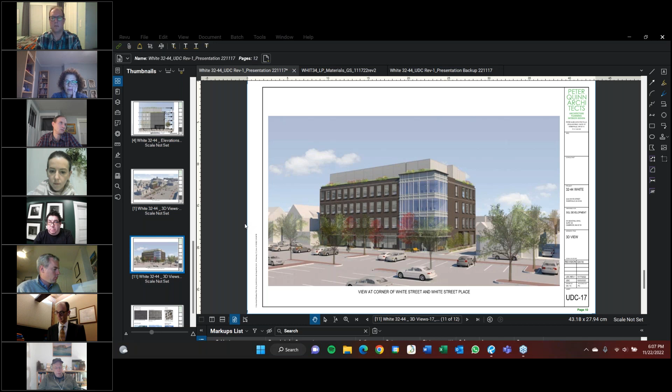Good evening, everyone. Thank you for making the time for us this evening. We've put together a concise presentation of the changes that we've made from the previous presentation in regards to comments that you had made. I think we've addressed everything, hopefully satisfactorily. So I'm just going to start. I also presented a list in the package of changes from the previous submission in narrative form, so I'll go through those if that's okay.

Now I do notice that a couple of people from the commission who were not in the original presentation are here tonight. Can I assume that they've reviewed the recording and we can move forward that way? For the record, I have reviewed the recording of the prior meeting. And Mr. Valdez has not reviewed the recording, but he is still able to participate in the discussion. He'll just not be participating in the vote this evening. Okay, thank you, that's good.

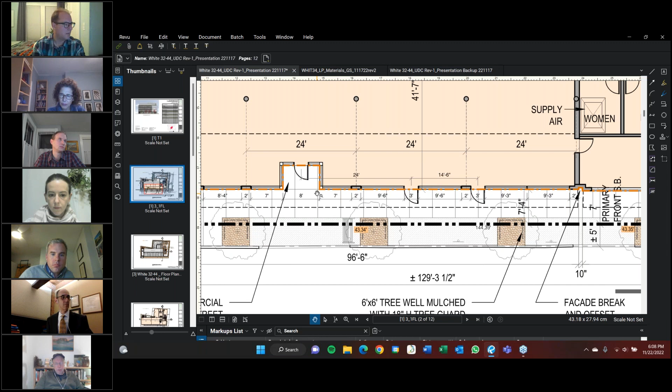Starting with plan changes that we've made, right off the bat, one of the things that was brought up on several occasions and from several different directions was the way that we had treated the base of the building in the commercial side on the left-hand side of the building. So we've created a niche for a doorway, a nice generous space, and you'll see that in elevation as well. At any point, if there is a commercial customer-facing user down here, they will certainly have a nice entry. The other entries are put in per the zoning bylaw to have a door every 30 feet.

On the rear wall, there was quite a bit of discussion, especially around landscape, about how we were treating this back part of the building. Here we've simply straightened it all out and tried to get rid of some of the kinks that were in here, and now it's just a consistent gravel walkway to the rear. We created a raised bed in this area, and Katya from the landscape department will speak with you about that later. We knew we were going to have a raised structure here to get the ramp to work underneath it, so we raised it even further with a planting bed, and that is integrated into our planting plans now.

In the basement, this is a small thing, but we wanted to take care of it. We did widen the drive aisle at the base to make it easier to get in and out of that driveway ramp going up, and we gave a full 20 feet back out for our innovative parking system here.

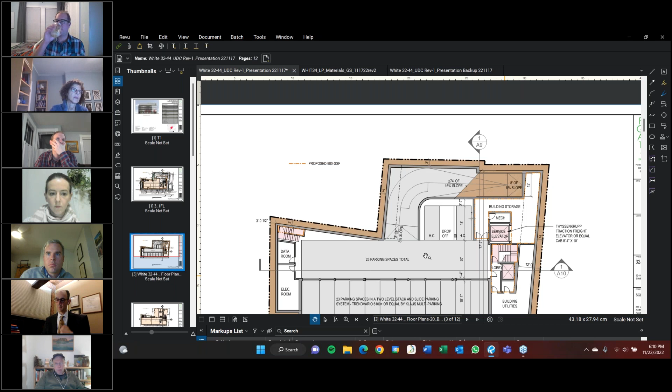The next thing is we had to revisit our bicycle strategy, especially around short-term bikes. So we now have five short-term bicycles that comply with the code. We also added a second bench in the front here and moved the short-term bikes over to this recess because we had originally had them on city property.

And then didn't want to let this go by without mentioning that on the roof, where we have a lot of mechanical system, that actually supports a structure that is solar ready. So you'll see that in a second when I go through the previews. That structure there can hold the solar panels when the time comes.

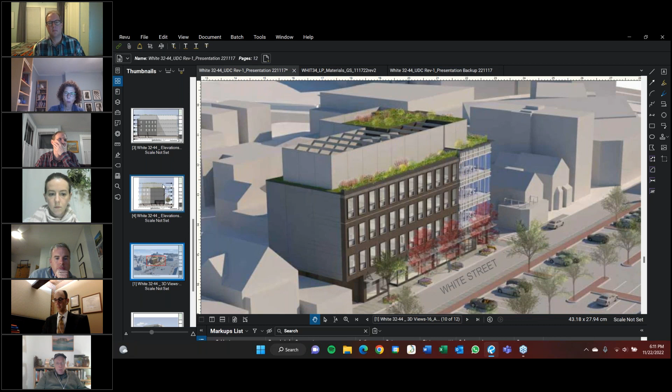Now, as far as the elevations go, where most of the work was done, let's get to my notes. We really emphasized what was called facade option number 2. We felt we could work with that the most in bringing it to a conclusion with some of the changes that you had requested. And so we did draw some things from the other two facades, but for the most part, we emphasized our work on this, what was called option number 2.

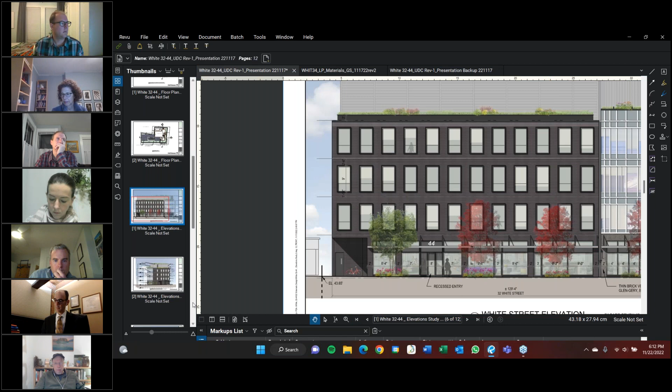So what we've done here is we've used a darker brick in this area on the commercial side of the building. We actually presented that in a set with a sample from the manufacturer's website. And on the other side to the right, you see there's a kind of lighter gray brick. That is what's used here and in this area here.

And to the same point, we did use that kind of brick in the upper area of the building to create a little bit of a differentiation of the top level of the building. So that has some of these lighter gray brick stripes up there now.

We did add wooden mullions, and we presented the windows with some scale elements such as blinds, which you presumably have in an office setting or a lab setting.

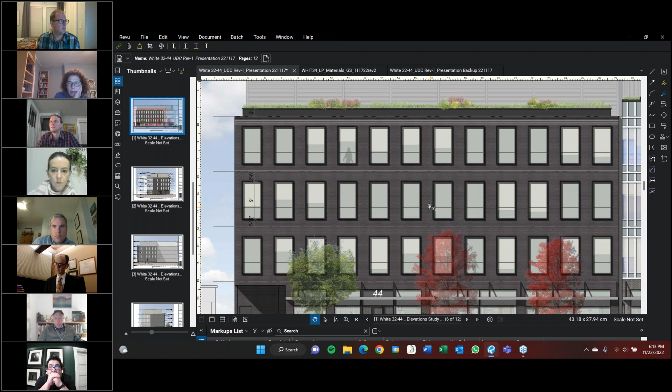And these planters are much more substantial now. They approach the full depth you would normally have for good-sized plantings such as we're showing, and that actually becomes part of a crown of the building, if you will. So with the banded brick and then the setback and then this raised planter, they're all architectural elements that are trying to work together to create the top edge of the building.

Elsewhere, let's see here. This spandrel glazing has been refined a little bit, and the mullion system is a little more interesting than we had before. We've also introduced some blinds and some sense of the space beyond just for graphic purposes.

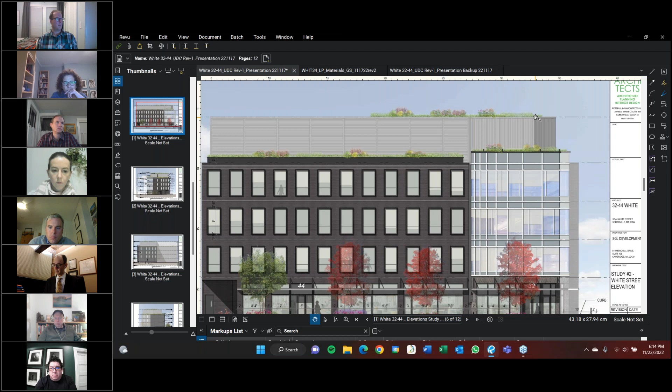As you can see up here, we've added another level of what would be a green roof, but it'll have a shorter depth of soil. I think we talked about that, but it is another green roof that we managed to expand into.

The glazing that we're using, these are some of the things we'd like to consider. Of course, we'll try to get a sample and do a site mock-up, or what do you call it, an as-built.

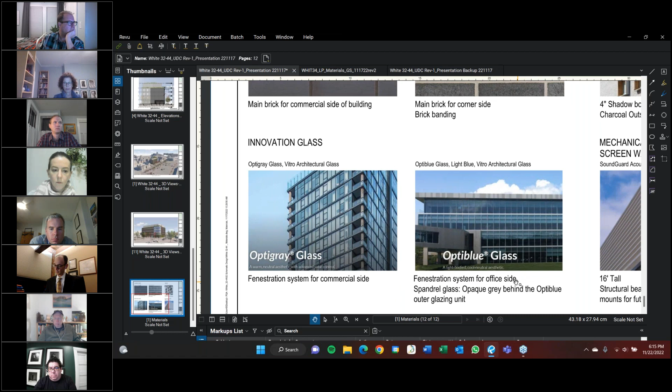In the main commercial side of the building, we have kind of a gray glass that has a little bit of a blue tint, but it's primarily gray. And then on the other side, the corner, we would like to use a glazing that is a combination of gray and blue. One side, the opaque, is a light blue, but it also has the spandrel, which is a gray color above. And you can see that here.

Now, one thing that we did do that we started to talk about a little bit before is these windows have surrounds, which create a shadow effect. You don't see too much of that the way this is presented right here because everything is somewhat dark, but I think you can see it in the 3D quite well.

So what we've done is created a banding that projects about 4 inches from the wall, and it's bicolor. The outer side of it is a charcoal color, and the inside is white, or off-white, or something like that. You can get a sense of how that would work and create a kind of dynamic effect as you walk past the building.

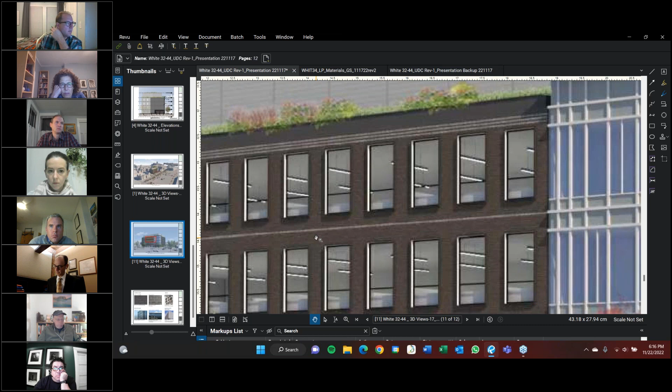Also in the elevations, at that entry I mentioned before, we tried to locate it further down the building as far as we thought would be useful, so it acted as a counterpoint to the main entry. We've also added signage on that extended canopy that travels the whole length of the building.

We've also arranged it so it didn't interfere with our tree pattern, and when people come out of the building they have more ability to move forward out to the sidewalk without bumping into the tree planters as we had before.

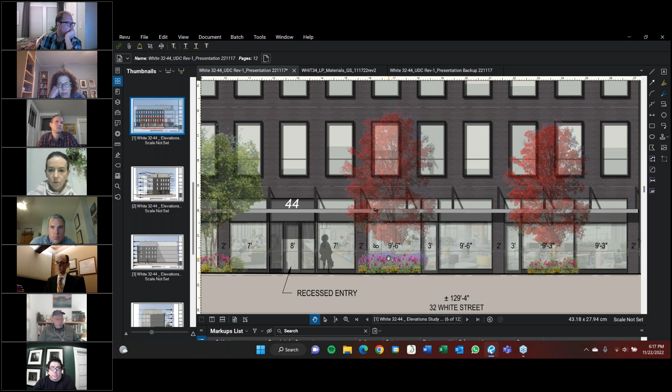On the side view of the building, we've cleaned up these recesses and openings for our automobile ramp and for our truck bay loading area, and these all work pretty well now. I think what I showed last week, the turning radii, so I won't go into that again, but all those things are still held fast and do work.

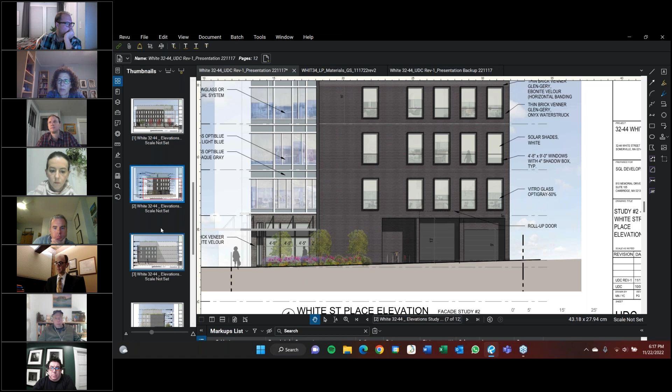Thank you. I just have 2 more comments on the rear of the building. There were some questions about that. So we actually kept the same window proportions that we had on the side, but we don't have the aluminum frames around them, or the projected frames.

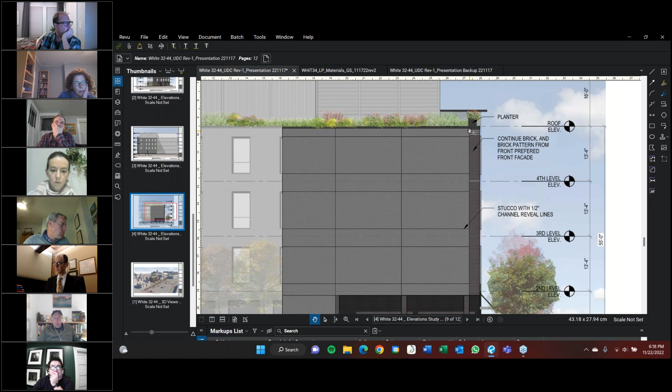This is a stucco finish, and we're introducing these zinc U channels into the wall to create a grid. That's carried across the whole rear all the way to the side facing the immediate abutter, and you can see how we wrapped around the brick at the corner, the end of the facade, so it has enough return to be substantial.

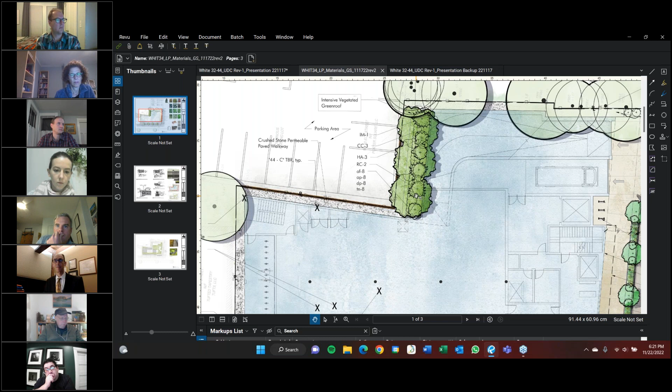The rest would be planter edges built taller than the finished grade, so there'll still be a clear path of travel around it alongside the property line.

We've expanded the bioswale, its length, as well as the root zone for the trees to grow in that bioswale. We're doing this—you can see it in detail on the next page, but on this page you can see a slightly shaded tone to the right of the curb line. And the intent here in our design includes...

...structural soil below the asphalt paving. This is a private way, and as part of our project we're going to have to provide a lot of new utility lines and things, and some of this asphalt will need to be replaced anyway and repaired in kind. As part of that construction, we will be providing structural soil continuous to the plant bed.

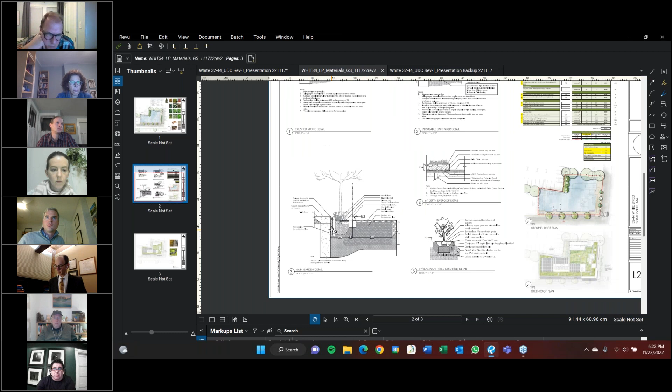Yeah, there's a good picture of it. So that bioswale, which is constrained in its width by the garage wall below on the left in this image, is constrained to about 2 to 2.5 feet wide, which is quite narrow. What we're doing is providing a place for the roots to grow below, sort of slightly smaller than typical, under that curb and over to the right underneath the asphalt in the private way. As I mentioned, we lengthened the bioswale overall along that sidewalk and planted a third small tree along that length.

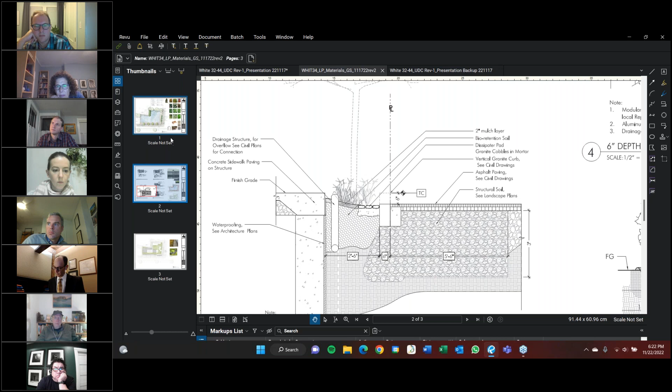Okay, thank you. We also refined the plant list for the tree plantings along White Street itself. There's actually an overhead wire to the left, so the tree on the far left will have to be a smaller size variety street tree. And as was suggested at our previous meeting, we will meet with the Urban Forestry Division and go through the species of the trees selected here to make sure they're appropriate for the situation.

And lastly, on the last page I think there's a third page that shows the roof, Peter, and that's where we can end. As Peter described previously, we've added another level of green roof above the mechanical room area, so there's a much larger zone overall on our roofs that will be vegetated green roof. The zone above the mechanicals in the center of the building will be a 6-inch depth green roof, vegetated with more sedums and slightly smaller plant materials.

Then the zone around the perimeter at that lower level, which Peter has designed as a taller architectural element, would be able to host taller ornamental grasses and things. So right now we're showing 6 to 10-inch depth of growing medium, and overall we still meet the green score, so that's good. I think we've improved the plan overall with everyone's comments and with all these refinements.

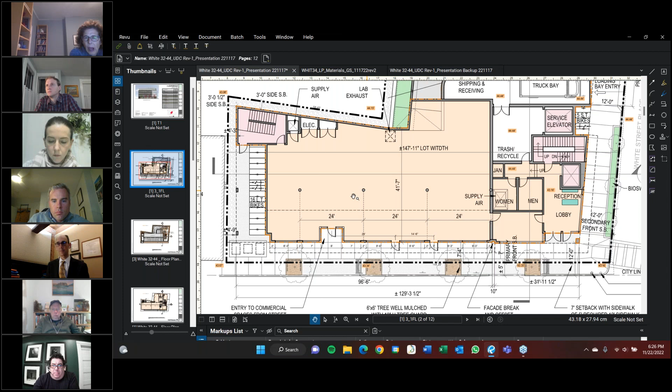What are those three dash boxes in front of the bikes? Okay, so we will have a very large underground electrical vault. This is flush with the ground, and it usually has these galvanized metal covers on them, and you can walk across.

So Emily, I had a question pertaining to these underground vaults. Being that now everything from a sustainability perspective, and the idea of being able to maintain power under any circumstances, a lot of places being designed are not allowing for vaults to be located below grade, just because of standards being established from energy and sustainability.

The idea that it's being proposed that these are below grade has not been obviously reviewed or vetted with NSTAR or Eversource. What happens to the design if these get pushed up and need to be maintained at a level above an established datum that Cambridge has, for purposes of water impacts? What happens in that situation? Cambridge does not allow below-grade electrical vaults anymore, and Boston doesn't either. So why are we even considering that this is okay if at any point these are going to come above ground, and then where are they going to be located?

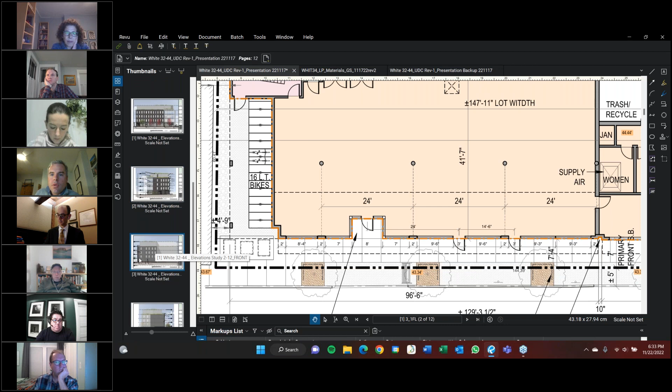I'm wondering if you could talk a little about the choice of material on the non-street facing sides of the building, the stucco. It's a pretty dramatic material transition between the street facing sides and what kind of appears like a back of the building.

Right. So, this is a kind of a tight back side here, and it's not highly visible from the street. You will see the corner of it when you're coming down White Street Place, and you certainly would see it on White Street when you're coming down on this side.

We also do have a brick base and corner that we're maintaining, so at eye level or a little bit below eye level, you still will see a nice brick material.

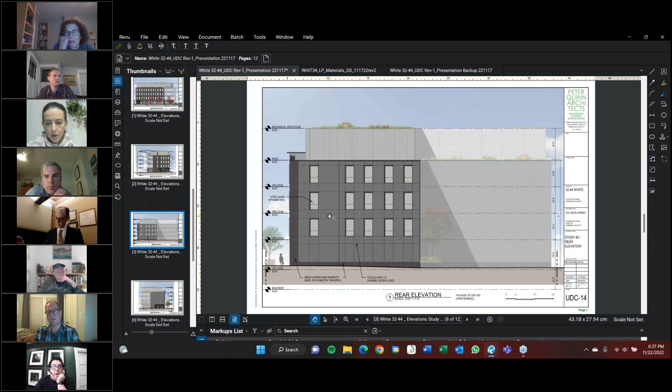And Mr. Graminsky is correct - you can provide recommendations that the planning board receive sample materials and further review certain materials. You can note recommendations for changes, etc.

I'd suggest that, and maybe that we take that path. My question was in part because there is a specific architectural design guideline for this district, and basically every district, that recommends against the use of EIFS.

They're particularly referring to the really cheap EIFS systems, which I understand what you're proposing here isn't that. But I do think, given this building and its context, this is a building that is much taller than what's around it, and that's likely to remain so, particularly on this side of the building. It's a residentially zoned neighborhood next to it. So these sides of the buildings are going to be visible from a distance, both from residential properties and adjacent streets.

To me, I feel like the street-facing facades are really well composed - there's depth, I think there's high quality materials being used. But this to me feels like a bit of a back, and a back that's going to be pretty visible. I think it would be different if this was adjacent to a district of buildings of similar height, because it wouldn't be visible from a distance. But in this case, it will be.

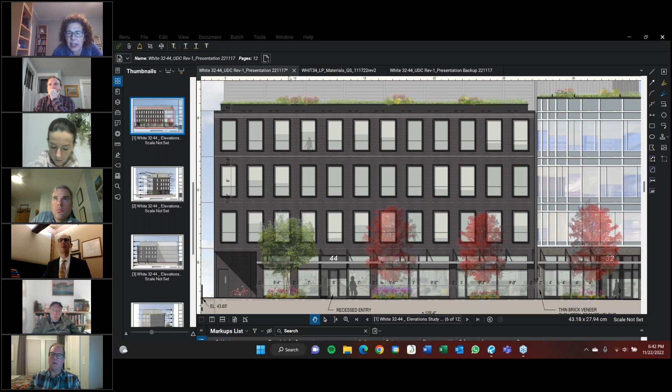I have a couple of questions about the windows and the details. It was a little hard for me to hear your description of the depth of the hoods, and the detail—I think you said a lighter brick that returned in, or whatever. But can you describe them again? Yeah, I'll go over it again, and the shades too.

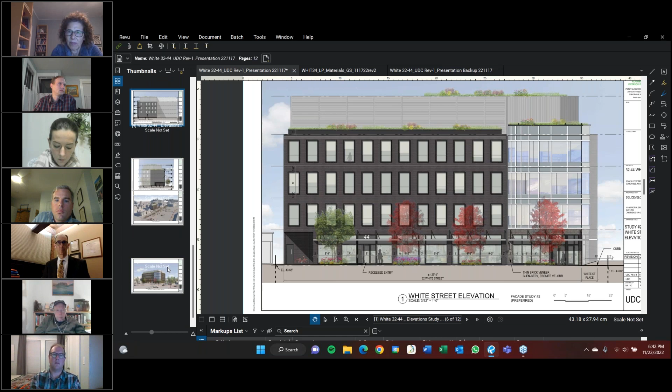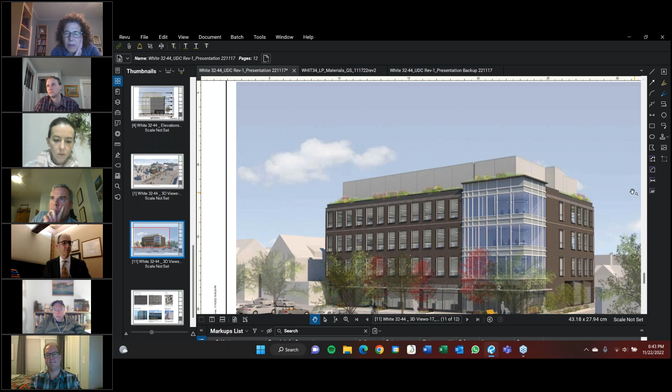What we have here is a material—this 3D view is probably best. So each of the windows has a 3-sided frame that extends out in front of the brick approximately 4 inches, with an additional 3.5 to 4 inch depth into the wall as well. So this is a band that's 7 to 8 inches deep total, half in, half out of the building. The intention is a play with light and shadow—the inside is a white color, and the outside is charcoal. It's a little hard to see, but that's how it works. Then there's a sill at the bottom, done with metal or a piece of ceramic material. That's the intention of these windows, and it's carried around to this side as well, where you can actually see the projection a little better.

And then the blinds and the lights are really just acknowledging that a lab like this, designed for these levels of lab use, will have solar blinds of some kind—not so much for privacy, but for solar gain, especially in the strong western sun, and any other need to cut out sunlight. Here we've drawn them all the same height for the purpose of this perspective, but there is actually a mullion coincident with the bottom of the blind. Does that answer your question? Yeah, it did.

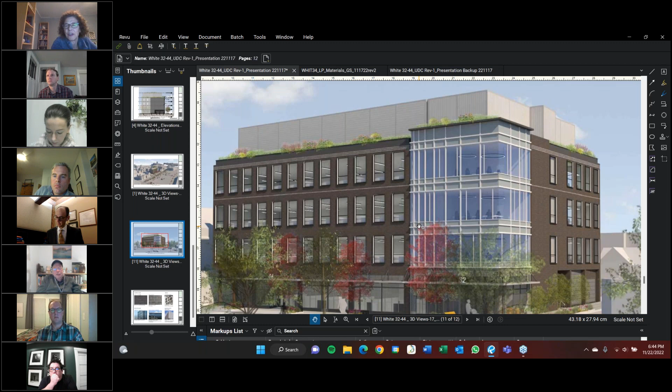Just a few comments here. First, I think the design on the street sides has come along, and it's good. I think the depth of those hoods around the windows is important, and if it could—there's kind of a precedent by this, right? Yeah, those are probably much deeper than 4 inches. I'd say the deeper they can be, the better, to get more shadow.

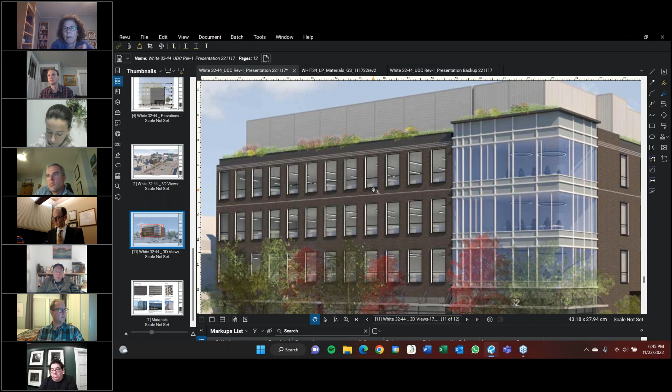You're not going to get a lot of shadow playing on the dark brick, but you're saying there'll be a brightness on the inside. I think the thing that worries me is the solar shading, your solar control, with blinds that are going to be all different heights, and if they're not good quality, they'll start to be even less organized than that. They make a big difference in how we read a building. And I wish there was some uniform element to this facade, exterior or interior, that accommodated the solar control for the inside, but wasn't going to yield something as disorganized as that. That's an interesting comment.

I don't think it's a positive thing. Maybe some people do feel that shades at all different heights is a good thing, but all of a sudden you won't see into the building at night except around those shades, and they'll really play on the overall effect of the windows within the wall.

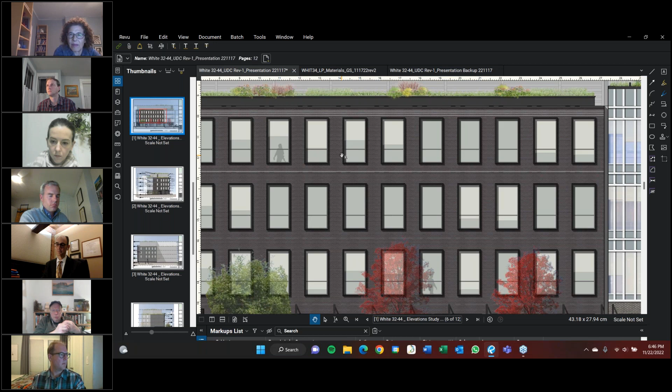So just a couple things — these are not intended to be opaque shades, so even at night, if lights were on, you'd see a little bit of light beyond there. We've done a number of glass buildings, and we typically put them on a uniform motor control. So with something like this, our render was having a little fun with different heights, but it would really be more like what we're showing in the 3D, where the shades come down to a more uniform height — maybe half the windows on one control and the other half on another.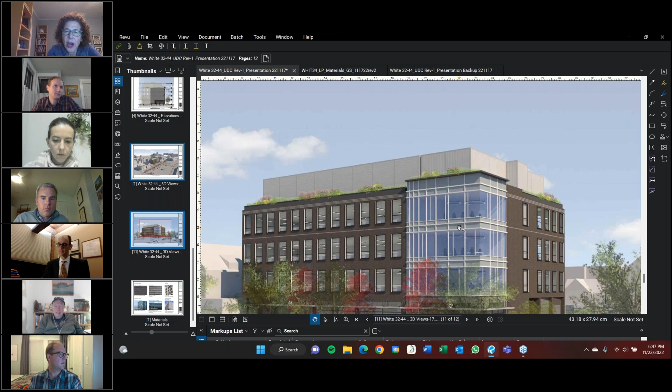How about at the tower, the glass element — how are you getting light there? So there are a series of shades as well, all motorized of course, and those would be of a somewhat different quality. We do want to be able to see in, but we also don't want to have a lot of light leakage at night.

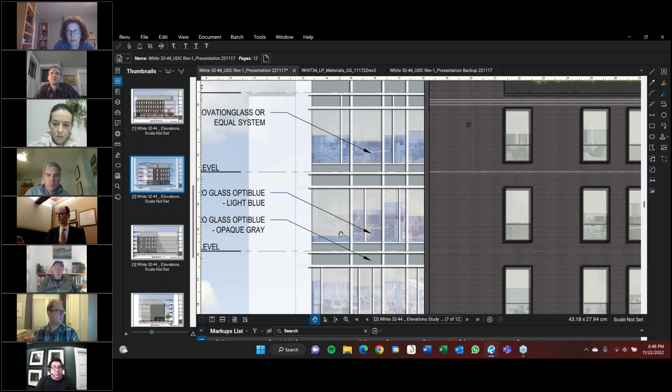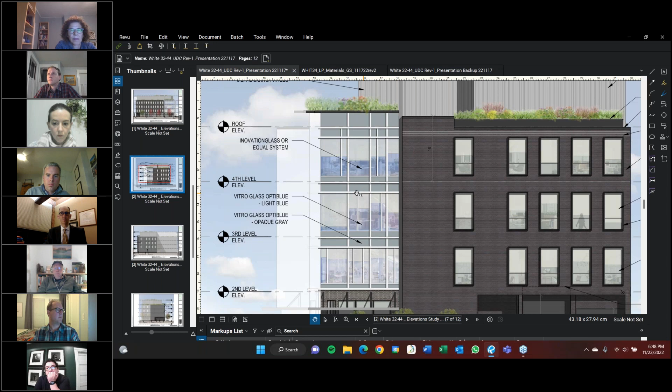That would be a series of similar blinds. We'd probably look at something a little more opaque — it could have an inner and outer roller. During the day, if you have bright sun, we could pull down and still allow a lot of light in, but at night it would be a little more private, so there's not a lot of light leakage out to the sidewalks and neighbors. But these areas at the corner are intended to be more common areas for the users — presumably conference rooms, reception lobby, and some of those typical public functions before you get into the lab areas.

So we don't want to shut them off entirely. That's my attitude on this. Okay, thank you. Yeah, sure.

I do want to note we've just passed the 20-minute discussion mark, so we can keep going a little longer, but I think we've discussed the landscaping, the building materiality, the differences between the street-facing facades and the rear facades, and the changes to the windows. Are there any other aspects? Oh, and the undergrounded transformers and how they may impact the design. Are there any other aspects of this design the commission would like to review before wrapping up?

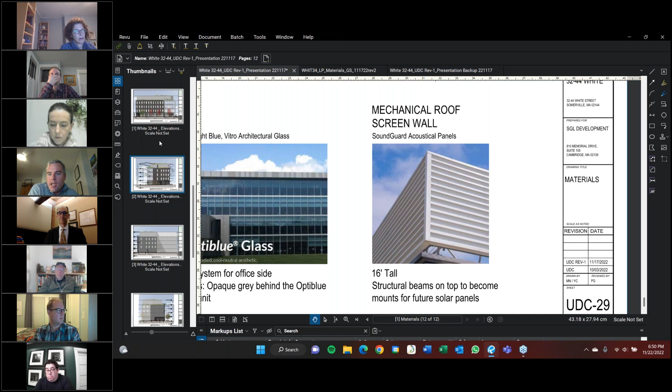Yeah, I'd like to talk about the mechanical penthouse screening a little. This project's in the MR4 district — the by-right height of the penthouse is 10 feet, and it looks like you're seeking a special permit to exceed that up to 16 feet for the penthouse. I understand the need for larger space for mechanical equipment for a lab building, if indeed this is really a lab building. But exceeding the by-right height limit means this is really going to be a visible part of the building, so I'm just wondering if you can talk a little more about that.

So, the way it's portrayed here in the 3D does make it look like a flat wall. I think we'll probably end up having much more articulation to it, depending on cost.

So we show this sample here, which has some very deep reveals in it. I think we need to study that further before we resolve it completely, because there could be some acoustic issues that we need to address as well. So that will kind of inform our final selection.

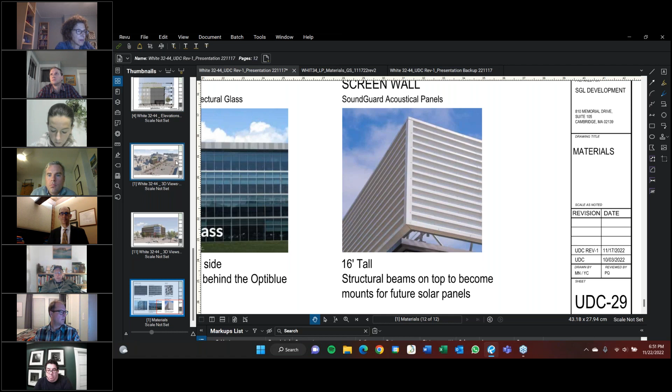Where I've done these before, we've also just simply built frames and then put a punch metal material on the exterior, that creates a kind of gauze-like covering around it, without entirely enclosing it. So those are some of the choices. That's a little bit how it's actually drawn on these 3D models, like a flat surface.

What we're hoping to do, honestly, is to get this green roof to grow, especially on the street face, where we have the deeper soil medium, to really get this to grow in front of it, so that it's kind of a layered system. You can see here, with a brick layer, a green layer, and then the screen layer. I think that will be a good effect to reduce the monumentality of the roof structure.

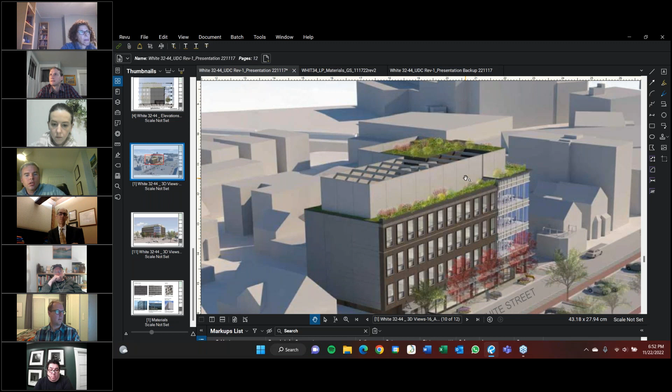Yeah, I agree. If that's more of an intensive green roof and those plantings are actually tall enough to be visible from the ground, that'll really help in buffering. That'll help mitigate the overall height.

Can you go to the roof plan, the overall roof plan? So is that the mechanical unit? Is that an air handling unit that's kind of outside of the screened area of the penthouse?

No, everything is in the screened area. So this area here where the solar panels are is showing you the screened area that is open to the sky, and where we put the solar ready area. But there's also an interior mechanical room that comes with this kind of building, and so that is an enclosed structure.

But then mech unit 3, which is north of that, is also outside? Also, yeah, that's screened as well. Okay.

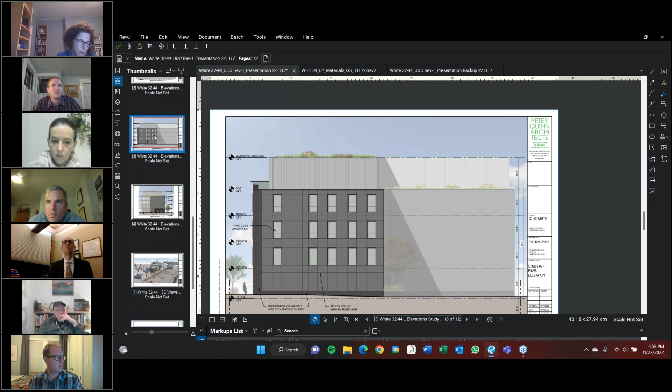I had two quick questions, comments. The image taken kind of showing the corner of the glass, it's showing the glass without a mullion at the corner. I'm just wondering if that was achievable, if that was really the design intent, or is there going to be a line that's expressed there?

And then my second question was, okay, sorry. Yeah, go ahead. If you want to talk about that, that's okay.

Yeah, it's just done with a silicone gasket, so there is actually a seal there, but it's braced by mullions that are 5 feet away. So yes, it can be done. It has the effect of a clear glazing, but there's actually quite a bit of a sealed gasket that makes that possible.

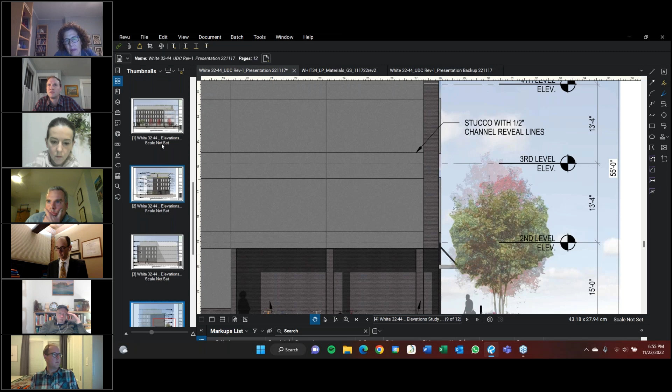Okay, I like the look, I'm just curious how you do it. Yeah, I get it. And then at the left end of the building, at the brick, it's very regulated and nicely composed. But when you look at the elevation, it seems to step up, and it doesn't align with the top of the glass at the retail. I was just wondering if there was something you were trying to achieve there, or if that could align with the glass.

I think we actually had some alternative designs that we presented last time, where at least one of them had this canopy flush with the top, and it was a little bit out of scale with pedestrian, such as shown here, where it gets too tall, and bringing this thing down does create a nice effect of a place to walk under. It's only about a 3-foot projection, maybe a little more, but I think when we look at it, I'd be happy to show you that. I don't know, maybe perhaps you want to.

Yeah, so that's the effect of this, our scheme 1, I think, where it's all brought up like that. And of course, it's slightly different because there's brick up there, but we needed to increase the amount of glass in their calculation. And there's one more.

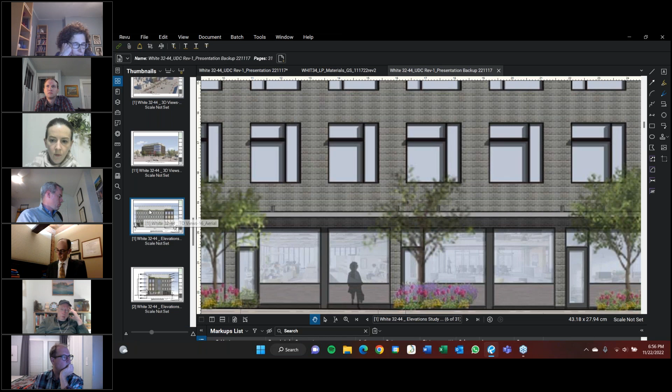Yeah, this one we loaded too. I think I'd be interested to hear others. I know Deborah last time had said that bringing it down actually helped the scale of the building some. So, well...

I think that the elevation of the canopy looks good in relation to the window. I was referring to where it steps up above the bikes, and it doesn't align with the top. I see up here. Yeah, yeah.

Were you trying to make that a different space and make it a little bit more celebrated, or is that okay? Well, it is just... we have these sort of little things in the building that...

We were trying to create a little more of a monumental cutout here, so that it corresponds a little bit to the scale of the other side of the corner. As opposed to, we certainly could bring this down if you thought that would be stronger. But that was the idea.

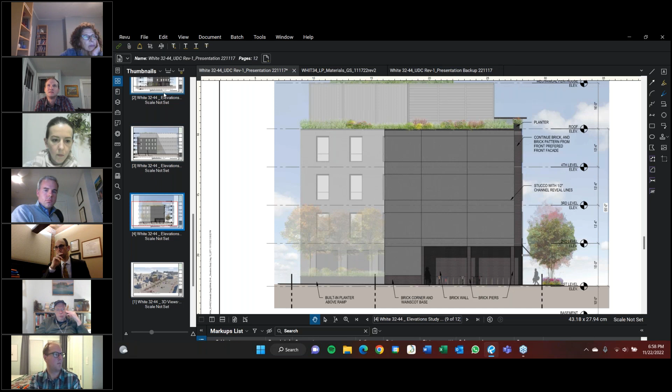Yeah, it's tough because it's so close to the height of the glass. It kind of either wants to be a little bit more separate or wants to align with the glass. It's an interesting observation that I should have picked up on earlier, but an interesting comment. If you can make that a condition, I'm sure we can live with that.

I'm going to jump in here because I think we've hit our 30-minute discussion mark. And I was wondering what the commission would like to do now, if you feel like you're in a place to vote on a facade option and the design guidelines and additional guidance, or if there are any other concerns you feel haven't been met.

I would be ready to vote on a facade option. I'm less comfortable with, I think, two unresolved things. One is the detailing of the penthouse, given that it really is part of the building. There's a base, there's a middle, the penthouse is the top of the building, and the materiality of the non-street facing facades.

Sounds like very good additional pieces of design guidance. Yeah, I asked, is it possible that those should be made conditions of things that we review before we go to the planning board? I was thinking the same thing. Obviously, we haven't designed the entire building to the nth degree at this stage.

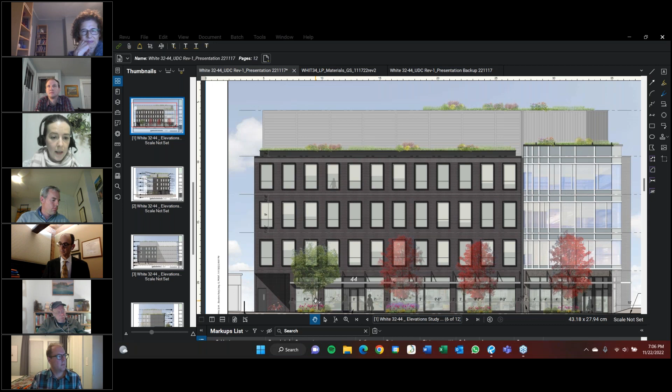I'm hearing that the commission is ready to vote on a facade option. They are ready to vote that the design guidelines for the MR4 district have been met, highlighting some specific guidelines for additional consideration and prioritization by the planning board. And that there is some clear additional design guidance to be incorporated, particularly regarding the materiality of the building on the non-street facing sides, the articulation of the penthouse, and recommending that the planning board consider requesting a mock-up for their review prior to approval.

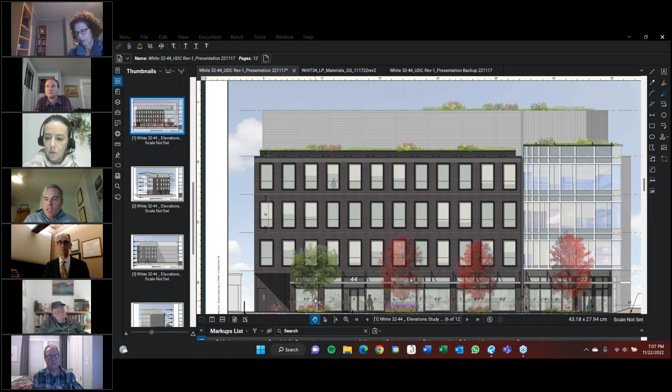All right, do we want to take these one at a time? Sure, go ahead. I'm not sure which facade number this is. I believe Peter said this is facade option 2 - it was originally facade number 2. So then, in that case, I would motion to recommend facade option 2.

I will second. Oh sorry, that's my role. Now we're going to take a roll call vote. And for this, Frank, you would simply abstain. So: Andrew Arbaugh, yes. Tim Talon, yes. Deborah Fennick, yes. Tim Hood, yes. Frank Valdez, abstain. All right, thank you, so that motion passes.

The next motion we're looking for is whether the design guidelines have been met for the MR4 district, and any particular guidelines that should be highlighted. I'd like to highlight 3 guidelines: E, M, and S. E is vents, exhaust, and other utility features should be architecturally integrated into the design of the building.

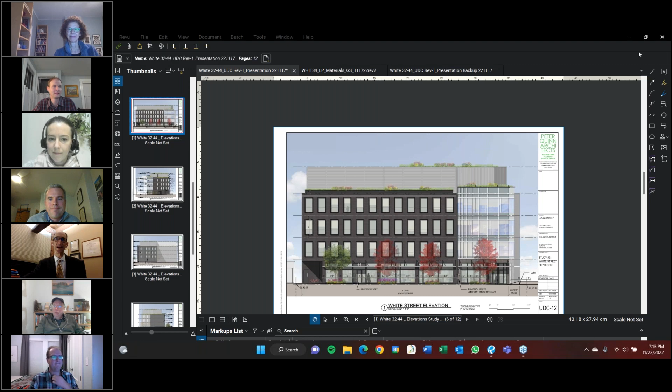Thank you. Thank you. Appreciate you. Everybody have a happy Thanksgiving. Yeah, exactly. Take care. Thank you.

All right, next up we have 8 Medford Street. This applicant is also returning, having presented at the previous UDC meeting. Do we have the applicants for 8 Medford Street here?

Yes, I'm Vigorita, the attorney for 8 Medford Street, and I'm joined by Tanya Carrier from Khalsa Design, our architect, and we do have Verdant as well, and also the developer, Nelson Oliveira. So at this time I'm going to hand it off to Tanya, and she'll go right into the plan.

And I'm having a problem muting myself for some reason. Emily, I may need your assistance. I apologize, I don't want any background noise while Tanya is presenting. Thanks, Ann, we'll take care of that. All right, great, thank you, Ed. Sorry, go ahead. I was just going to say, go ahead, Tanya.

Sorry, okay, perfect. Good evening, Tanya Carey from Khalsa Design. We'll be addressing 8 Medford Street, as Ann mentioned. We were here about a month ago, and we heard some very productive feedback, and we hope that we've incorporated it for you.

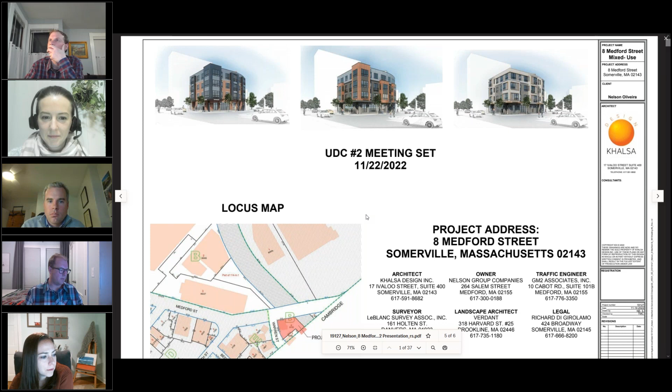Just a reminder of the project team: developer Nelson Group, Nelson Oliveira, architect Khalsa Design, landscape architect Verdant Landscape Architecture, and Erin will be presenting the landscape changes today, and GM2 for traffic.

And I'll do a brief recap of the full project, but just very briefly. Our site is located on the corner of Medford and Warren Street, and we're actually right on the Cambridge line. We have a site of about just over 6,000 square feet, and we're in the MR4 zone, with Medford Street being a pedestrian designated street.

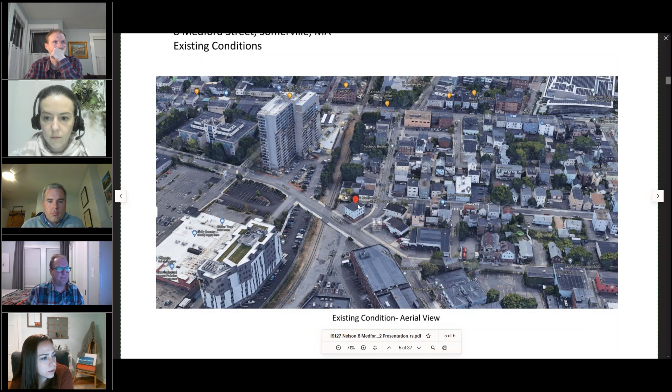And the view of what's there now: there's an existing 3-story flat roof structure, and the rest of the lot is paved.

A brief summary: we're proposing a general style building. The ground floor would be commercial space at approximately 2,250 square feet, and the full building area would be just over 21,400 square feet. Above the commercial space, we propose 18 residential units, rentals, with 20% of the units to be affordable, which would be 4 units in this case.

Some of our public improvements are increasing the sidewalks on both Medford and Warren Street to 12 feet wide per the zoning code, addition of 4 street trees, closing an existing curb cut on Medford Street, and addition of visitor bike parking. We also propose a green roof and permeable area to the site to help with drainage. Currently, like I said, it's all paved and has the building there.

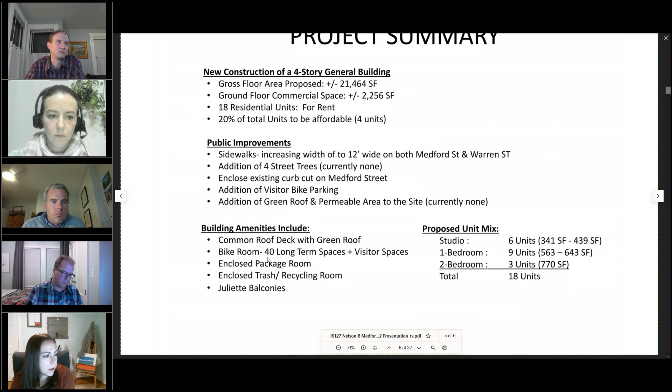And we have some building amenities, including the common roof deck with green roof, 40 long-term spaces for bikes, more than double the amount of units. We have bike parking along with our visitor spaces. We have an interior package room and trash room, and we have some Juliet balconies.

In our studio, 1-bedroom, 2-bedroom mix, we have 6 units that are studios, 9 units 1-bedrooms, and 3 2-bedroom units.

So we've added in realistic renderings showing the adjacent existing buildings along with the proposed development that's been approved across Warren Street. And another item was that two of the schemes had masonry bays which were cantilevered.

The idea you guys spoke about, which made a lot of sense, was that that was a heavy material being cantilevered versus a lighter material you typically see on a bay. So we've done some reworking there on the facade.

You also mentioned to start a conversation with the city about the public improvements on the public realm. We did have a meeting just recently, a couple of days ago. It took a little bit to get scheduled, and Erin will go over what we found there and what was discussed.

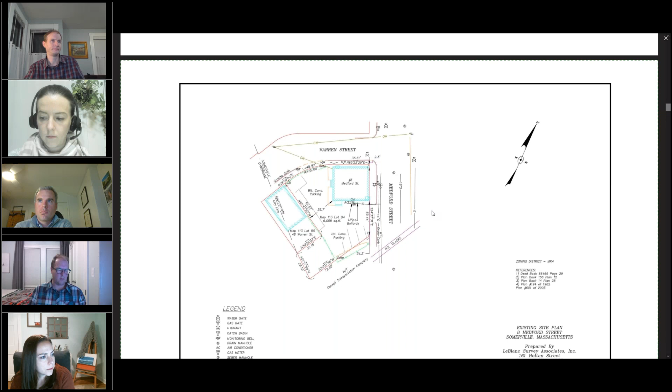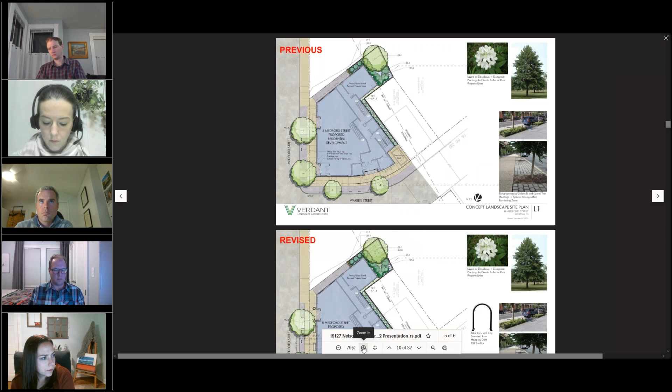So at this point, I'll turn it to Erin from Verdant just to briefly go over the landscape changes that were made and the outcome of that meeting.

Erin, this is Andrew Grabinski. You are free to talk. I see that you are unmuted on your end. Erin, we still can't hear you. But it shows that you're appearing as unmuted.

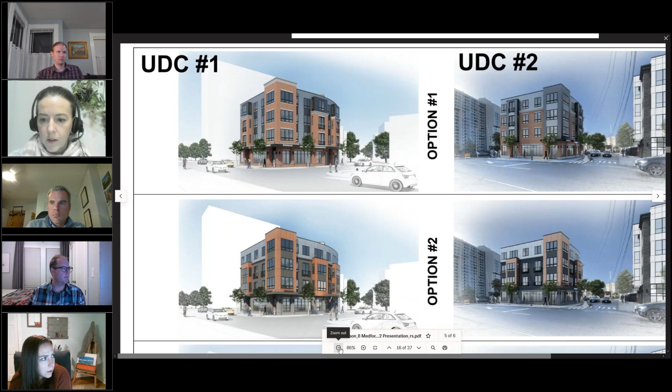Tanya, would you like to keep going and give Erin a couple minutes to try to figure that out? That's a great idea, yep. So we'll continue with the rest of the architecture first. Sorry about that, Erin. As you've seen with me previously, I had some technical difficulties earlier too.

All right, so here we did a nice side-by-side comparison. The left side of this page is our first meeting, and the second column is today, our revised design. Apologies that they're at slightly different angles, but that's because we wanted to show the entire context as requested, both sides of the building.

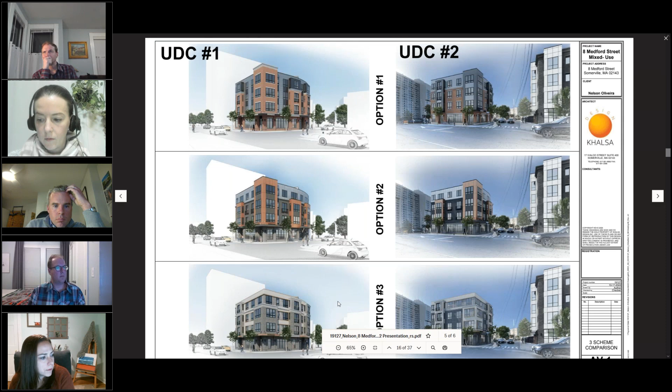I'll do these one by one, but this is just kind of a brief overview to show what we've done.

So option 1 for the facade scheme. This was our previous version. We had brick on the bays, which was reading as a bit heavy, and we did not have the context to show how it might fit in.

So what we've come back with today is we've kind of reversed the materials. We've kept the brick on the first floor, extended it up 2 levels on the main massing. And then on the bays, we've put the lighter material - a standing seam metal siding with an insert area of a lighter gray composite panel. We've used that same panel on the top floor as well to give the top a lighter feel.

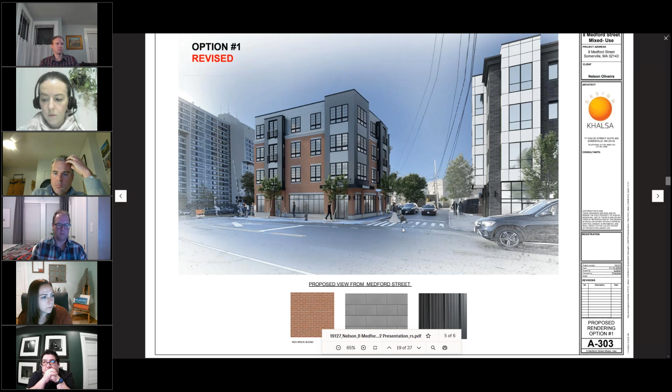Here you can see the existing large structure to the left, just past the railroad track. It's a good distance away because there's a railroad track and a full parking lot. And then just across Warren Street, this is currently the Cubby oil site, but we've superimposed the model that's already been approved by your team and the planning board to show how it might fit in with that development when they're both constructed.

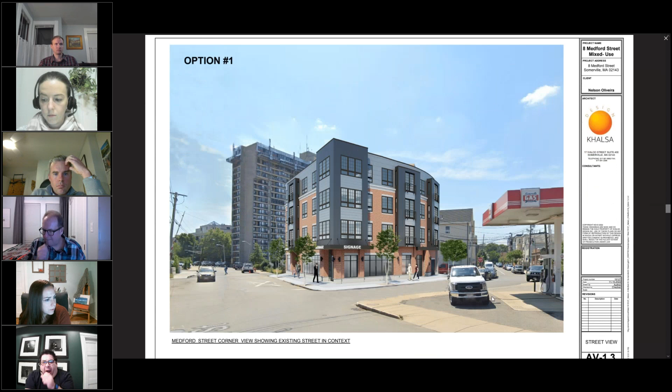And just a larger view of that first image. This is how it looks currently with the Somerville gas station, if that building were not constructed.

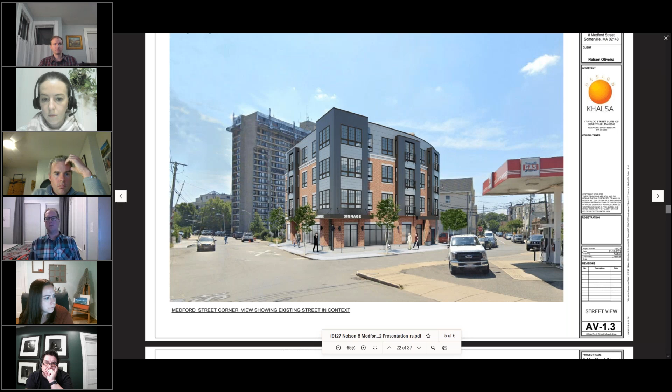Okay, so moving to option 2. This scheme, we didn't change as much, but we did provide the context because there weren't too many comments on this one. So this has kind of lighter materials on top. The brick does not extend all the way up, but we do have brick on the first floor.

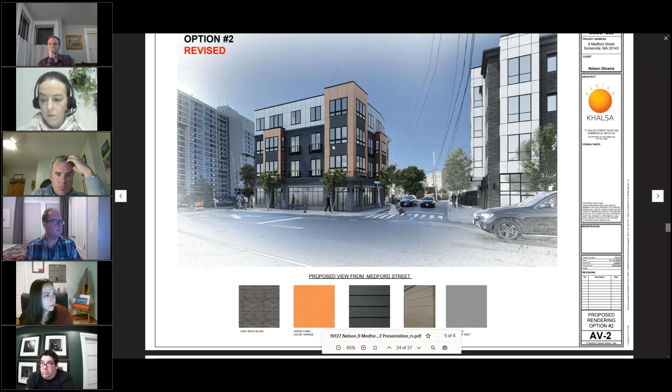So here's the revised version showing context. We have a 3-story bay above the base with our signage, and we have different materials such as Hardie or composite panels in a fun orange color, and then we have insets with lap siding and different Juliet bays, and we've done simpler casement style windows in the scheme. And a few different views of that building, again carrying the same treatment all the way around. And a close-up showing coming from the Cambridge side how it could look with the lighter panel top and the accent color on the base.

And this gray brick kind of coordinates with the development proposed next door. There is both gray, or there's proposed gray brick in the neighborhood, and there's existing red brick, so either could be argued as a potential option. And just one more view of how it would look with the Somerville gas station there.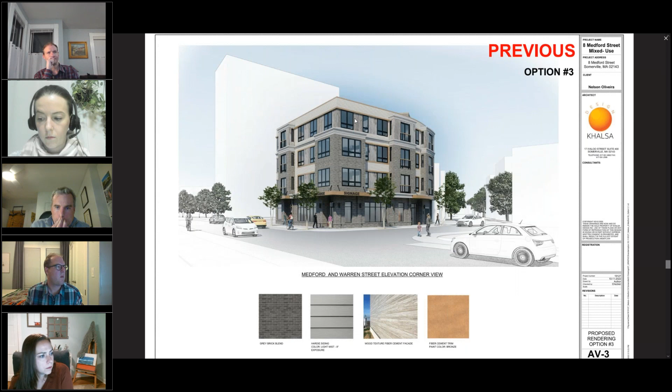Now to our last scheme. So this was our previous proposal with the gray brick on the bays, and this had more of a textured monochrome feel with the pop of bronze accent around the window areas. And here is our revised option.

So this kind of fits in nicely with the neighborhood context. We've done 3 levels of gray brick, and then on the bays, we've done white lap siding along with the wood texture fiber cement in kind of a driftwood scheme, and then our bronze accents around the windows. And this has a lower bay than the other schemes where the corner wraps in a different treatment.

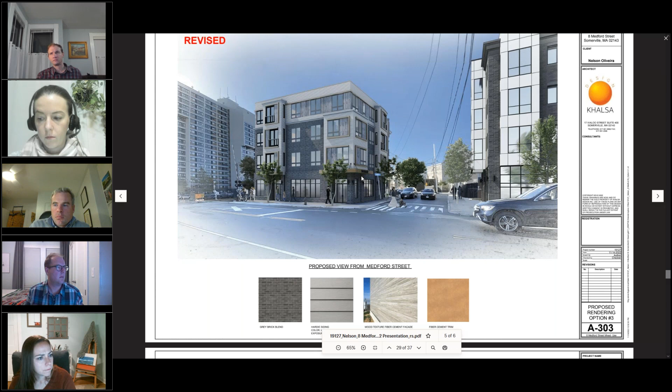A couple more images of how that would look, and finally the additional view coming from the Cambridge side. We did work in Juliet balconies, and we staggered them here and on the other side for a bit more dynamic feature in the scheme. And just the corner view.

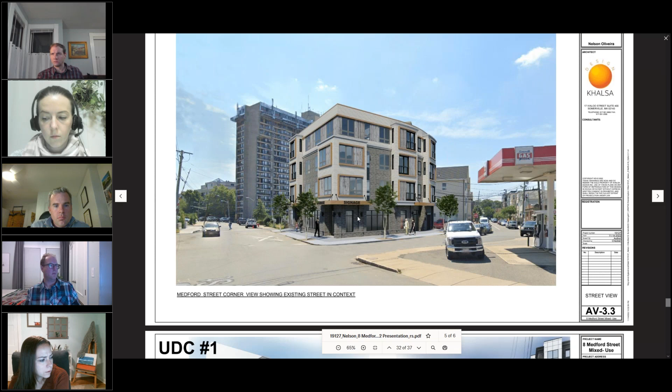So here's a comparison of all 3 schemes together, so it's easy to digest all together.

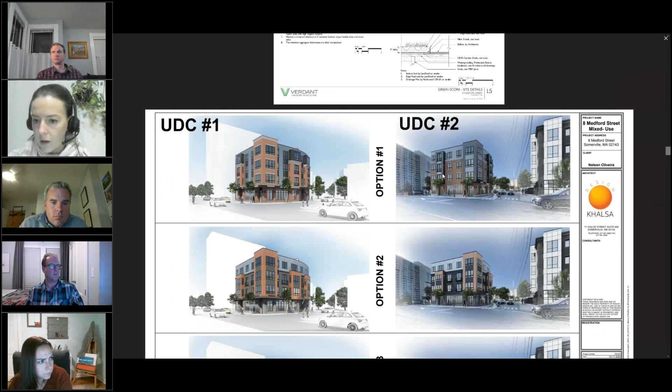All right, so I see Erin has her hand up. Erin, you may need to unmute. Oh yeah, Erin, you're self-muted. All right, so we see you're unmuted. I'm still not hearing you if you're speaking. Erin, it may be worth maybe leaving the meeting and coming back. All right, she has left, so we'll just give her a second. We're still self-muted on your end, Erin. So Erin, if you click that unmute button, then we'll see if we can hear you now. Okay, are you able to hear me now? Yes, we are, there we go. Great, sorry about that. No problem.

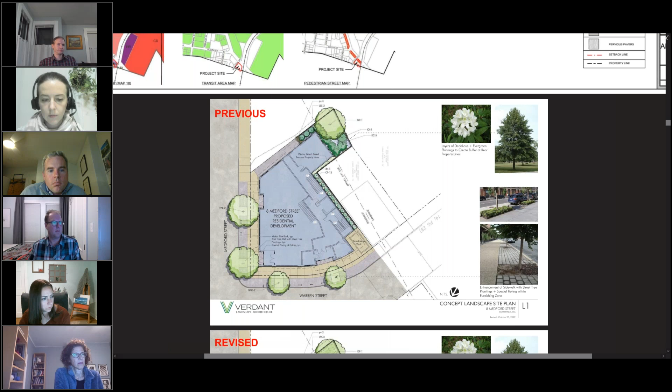So Erin Hosseini Fitch from Verdant. Just to go briefly over what was previously shown, it was our early phase of the landscape plan, so the streetscape was not fully refined yet, which led to a conversation with the Public Space and Urban Forestry Department, as well as mobility. Beyond the streetscape itself, what was currently proposed alongside and rear property lines are native buffer plantings. That's mostly what you see in the top portion of the site.

To go more into the current revised plan, based on the discussion we had with the city, we started to refine the streetscape. Previously we had proposed within the extended 12-foot width sidewalk a 6-foot width public right of way and then a 6-foot width tree pit and special paving zone. This has been revised to an 8-foot width public right of way for the sidewalk, and then a 4-foot width for the tree wells and special paving.

The tree wells themselves extended longitudinally to make up for that shorter width. And since the public right-of-way was extended, we had additional room along the frontage of the building. Here we were able to add benches for pedestrians, seasonal planters at entryways within this space. We also were able to tuck in some of the bike racks required for the development within this frontage zone that is also within the property line.

Additional bike racks for other visitors are along the streetscape. The tree pits themselves are proposed as 4x10, providing 40 square feet of soil and space for the trees to grow. This will include structural soils below the trees connecting to the different tree wells. There are also tree guards that will be installed at these tree pits to additionally provide protection of the trees. Those were the main updates for this landscape.

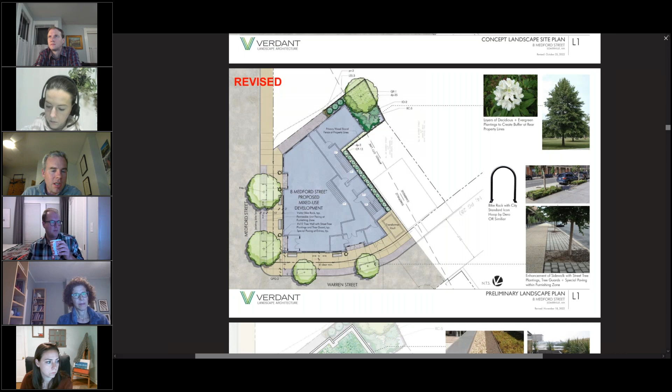So there are a number of projecting bays on each side of the building. Is that something being coordinated with tree placement? Is there any concern about proximity of trees to the projecting bays above? You can see here the dashed lines where the bays are projecting, so they would not come close to the trees on the outside of the curb. I think there should be plenty of room, but we can look at where they fall.

Tanya, if you show the previous landscape plan, it actually does have the dash line on it. So we have been coordinating the bays with the trees. Okay.

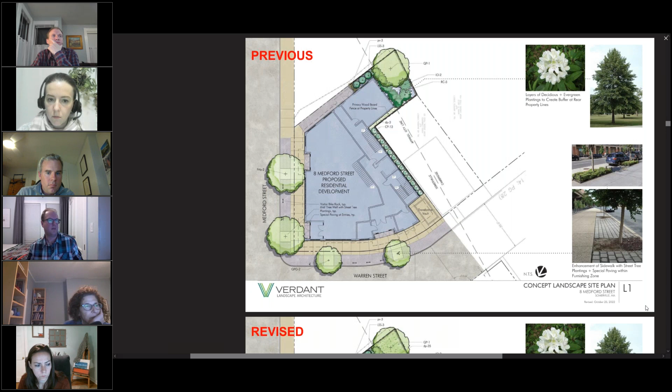Are there any other questions, comments about the landscaping? Hearing none, do we want to move to the building design? Do we want to discuss a preferred option? Anyone want to go first? Should I go first? Sure.

Yeah, I appreciate the refinements. I think there are improvements from what we've seen last time, and appreciate the context as well. I'd be interested to hear the architect's preference. I think mine is for option 2.

The colored bays add variety along the street. I think that's materially consistent with some of the adjacent buildings, but it's a pop of color and a pop of interest here. In the rendering, the material in between the bays is appearing very dark. I think from the palette shown here, it doesn't look like it would be quite as dark, which would be a good thing. And I think there's a consistency with the building next door without repetition, which maybe is part of creating a somewhat cohesive streetscape along here.

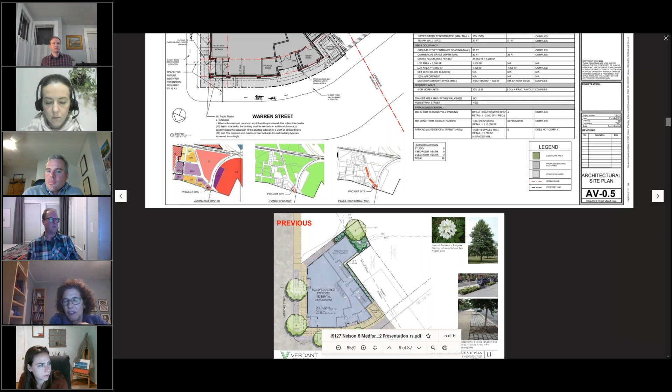Tanya, is it the same projection as the side bay windows, or is it greater? They're all, I believe, 3 feet projection. The dotted lines make it look like they're all the same, but I was curious if that's accurate. Yeah, so they're all 3 feet projection, because we're required to have windows on the sides, so we wouldn't be able to go any less than that. Just the zoning requires it.

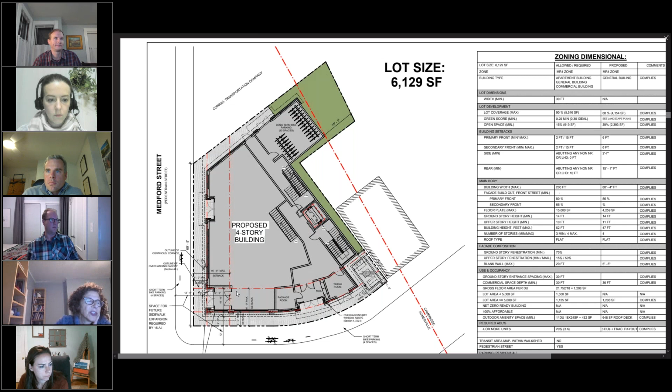So given that the bay window is going to stay like that, I think the second one, in terms of massing, is a little stumpy. I mean, I wish it were... it feels too aggressive still. Maybe it shouldn't break the cornice line. Maybe it should be more like the height of the flanking bay windows. Did you try that option for massing?

Not here. So you're saying on option 2, having the bay stop at the height of the other bay, and then the top material just wrap around? Yeah, that could work, that's an interesting suggestion, Deborah. I think in option 3 there's a 3-story bay there, but it doesn't break the main cornice line, it's a foot below. I wonder if having that high cornice line run consistently all the way around the building, but just pulling the height of the bay down, might get at what you're thinking of.

Yeah, then I do like the color palette once we do that. It just holds together. Right now it's these small things trying to dominate the composition, especially that corner piece. And I think that would make a much more appropriate scale. Okay, thank you.

I was drawn to option 2 and 3. When you first presented, I was more partial to the corner going all the way to the roof, but I think the refinements in the materials in option 3 drive me more towards option 3. There's a lot of contrast in the colors in option 2 - I don't mind the bright colors, it's just that looking at it from the corner, it seems like a lot of it, and it makes it a little less special, I guess. So I'm leaning towards option 3, and the height of the corner.

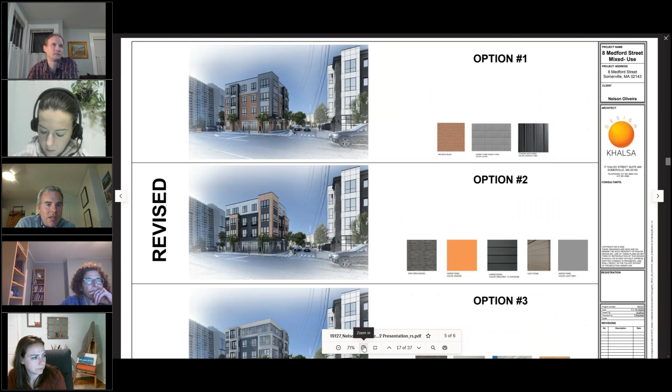One thing I'm wondering about, and maybe I'm not as much of a fan of in option 3, is the use of the wood texture fiber cement facade, which seems like it's almost boarding up some of the window in each punched opening.

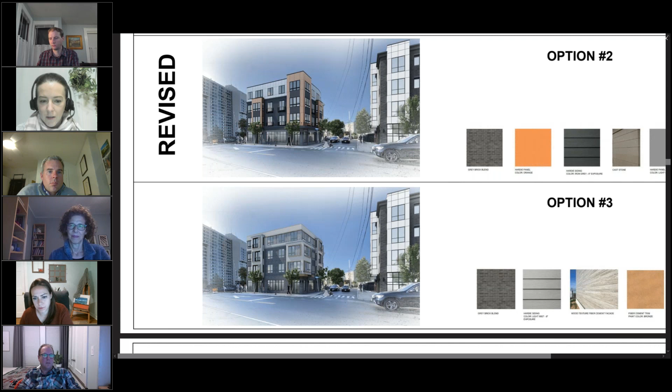And so we are all set. That concludes this design review, and we will get those written recommendations to the applicants ASAP. Great, thank you so much. Thank you all. Thank you.